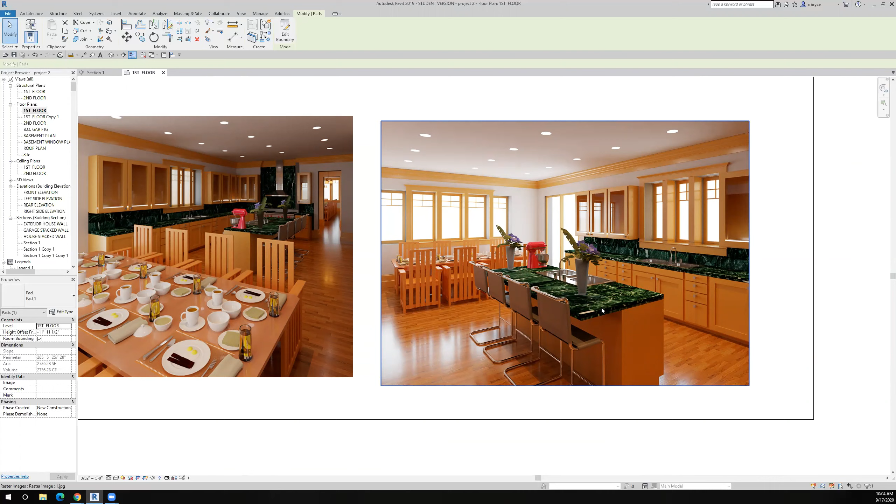So basically what I'm going to do now that I have my guidelines put in there is I'm going to go up to the architecture tab, and I'm going to go over to the component icon, but there's a drop down there, and I'm going to drop down and say model in place. So we're going to model this in place now.

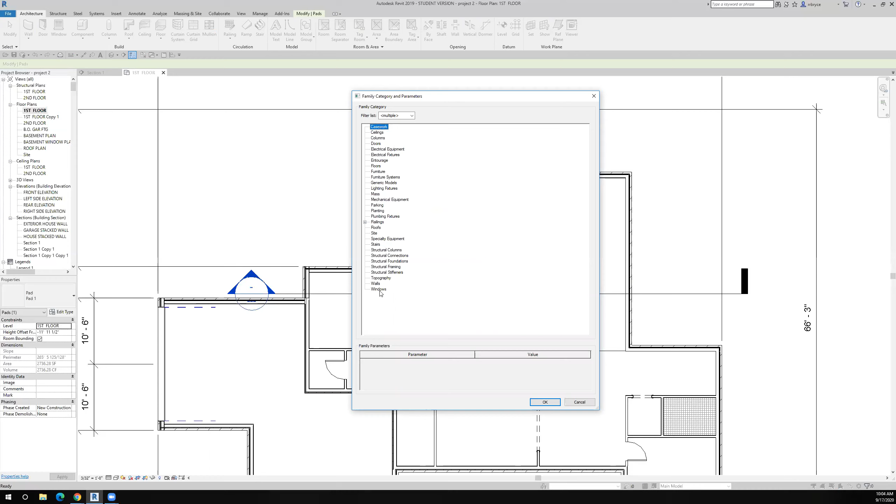I have to put it in a particular family, and I generally put my countertops in the casework family, but you could also do it in the generic if you wanted to. This will help you when you want to turn families on and off like you would turn layers on and off in AutoCAD, but I'll put it in the casework family.

Revit's automatically going to call it casework 1. And then the next one will be casework 2, casework 3. And you can change that to any name that you want to, but I just leave it alone. That's fine. So now Revit wants to know, what do you want to do? You told me that you want to make your own component, that you're going to model it in place. Which of these options here do you want to do now?

Do you want to make a void, or do you want to make an extrusion or a sweep? And we'll cover all of those other options at a later time. But right now, I'm going to make an extrusion. And so basically Revit says, well, give me the outside perimeter. So I'll use the rectangle or square icon.

And there's my perimeter of my countertop. And then Revit wants to know, okay, relative to the work plane, which is the first floor, where do you want this extrusion to end? And countertops are generally 3 feet tall, and in this case, we'll make the countertop 2 inches thick, which means that it's going to start 2 inches below 3 feet, or 2 feet 10 inches.

Okay. Now I can give it a material. Let's see what we have available here. In that tutorial, I made it green marble. I've customized the particular material, and I have another green marble here, but I'm going to just use tile because we can see it better. And we can always go back and change it later, but if I put it in as tile, it will show up for you to see a little bit better. So I'll use this porcelain 4-inch tile.

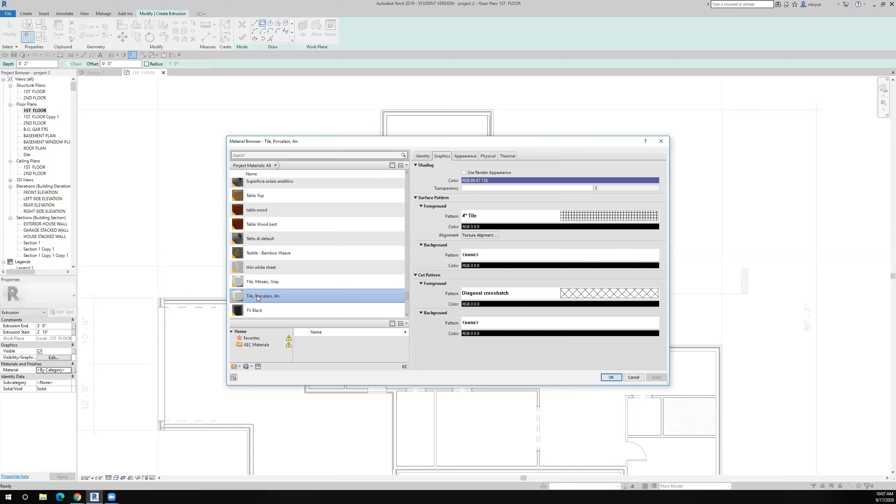Now, tile is a horrible material to use on a countertop because it has grout between the tile squares, which makes it very hard to clean. Generally, you would want a smooth surface like a marble or a granite, ideally, or a plastic laminate that has a smooth surface without the grout lines in it. That's not a good choice of materials, and I'll change it later, but I'll leave it like this now because of the way it will appear on the screen, and I think that'll help a little bit.

So, okay, I like what I have here. I can't do them all at one time. I have to do them individually because they have to be closed entities. So I will accept that. And now you can see that it's put the tile in there.

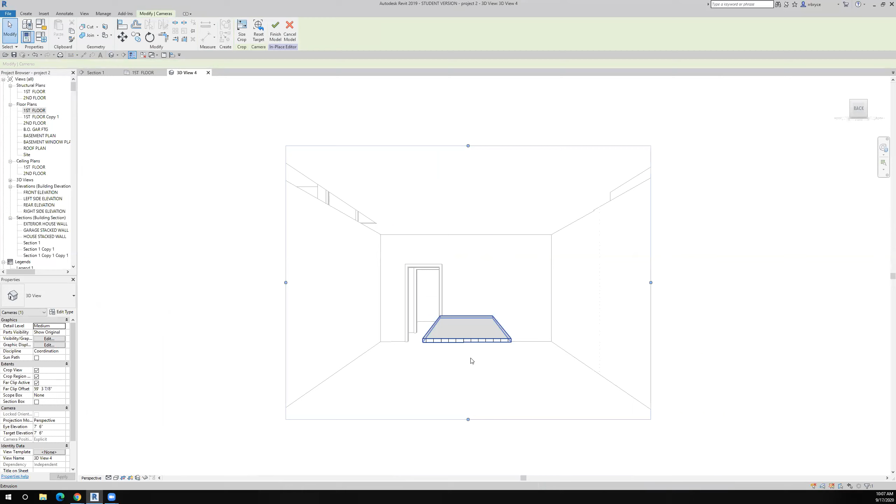But more importantly, I'm going to come over to this 3D and actually use the camera to show you what I have just done. So I'll put the camera right here, and I'm going to take a picture in this direction. And now you can see that I put this countertop in. It is 3 feet off the ground. Whoops. Let's go back and take a look at that again.

I'll highlight this, and now when I rotate this by holding down the shift key and the mouse button straight down and then moving the mouse around, it allows me to spin it. But it's rotating now about this object, whereas before it was rotating about some other place in space, which made it really difficult. So that's my first countertop.

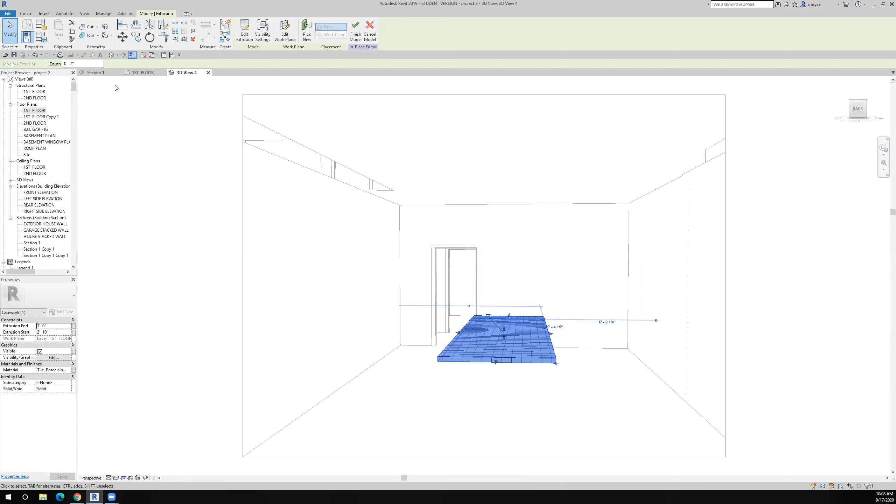Let's go back and put some more in. So it looks good to me. I'm going to finish that. And we're going to go back to the floor plan here. And I'll do it again. Architecture, drop down of the component to say I'm going to model it in place. We'll still use it as casework, but now look what happens. Revit adds the number 2 after that. They're calling it casework 2.

I'll say, okay, back to extrusion. I will just draw this one this time. So I'm going to draw the perimeter first. And it's very simple because I put those guidelines in there. And I will see that it defaults back to the same height and the same material. So everything looks good. I'll just say okay to that and okay to that.

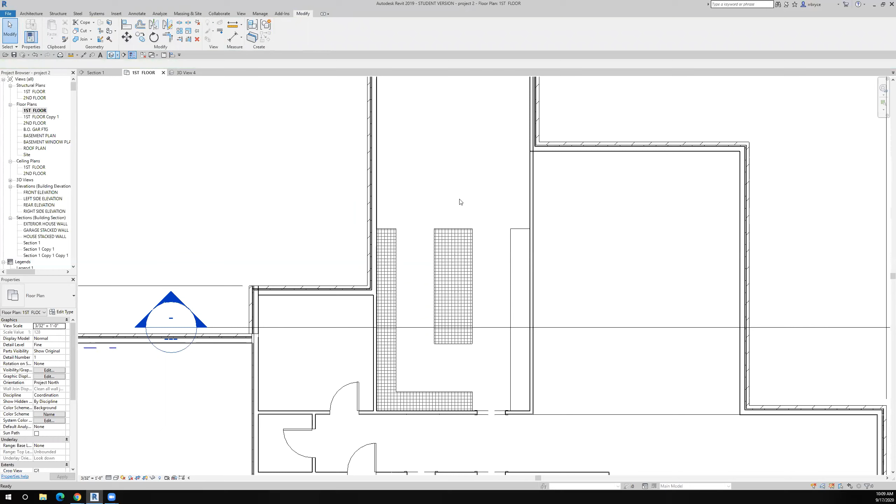And let's take a look again with the camera what I just did. So I'll put that camera back here, point it in this direction. And now you can see that I have put in 2 countertops. And I spin it around a little bit and you can see that.

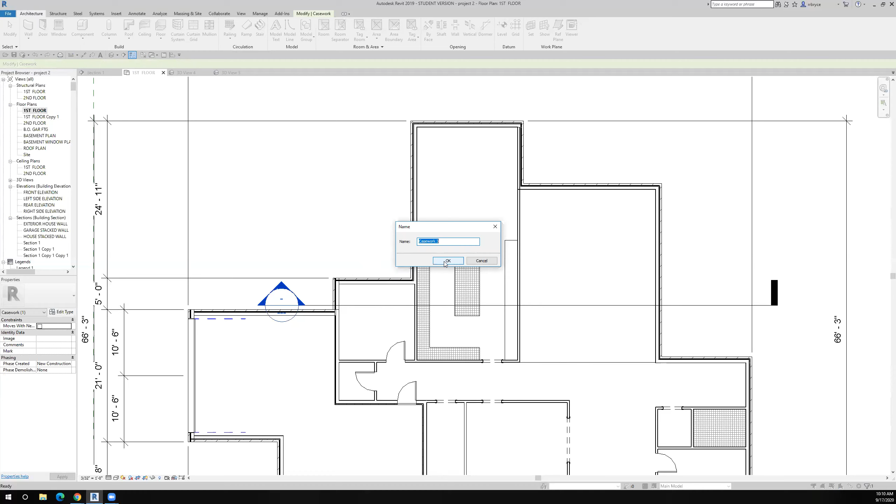So let's go back to the first floor, put our third and final countertop in, over to component, go to the drop down, model in place. I'm still putting it in the casework family. Now the name of that one is casework 3. Revit's adding another number every time. You can change the name if you want to, but I don't see any advantage to it, although there may very well be an advantage to that.

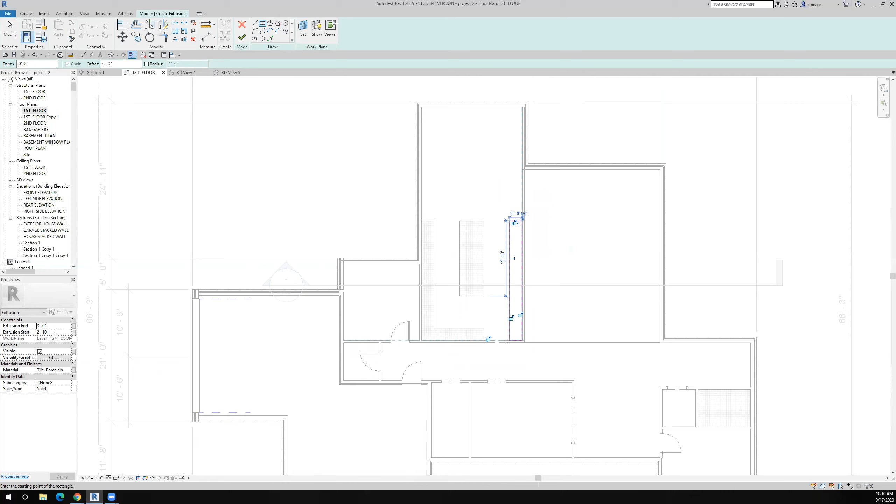And now I'm going to do an extrusion again. Well, I guess I can use this square now. I'll pick these 2 corners. It's defaulted to what I had set for the last 2. 3 foot is the extrusion end, 2 foot 10 is the extrusion beginning. I'm still going to use the same material. I'll say okay. I'll say okay. And I'll put that camera in and let's see what we just did here.

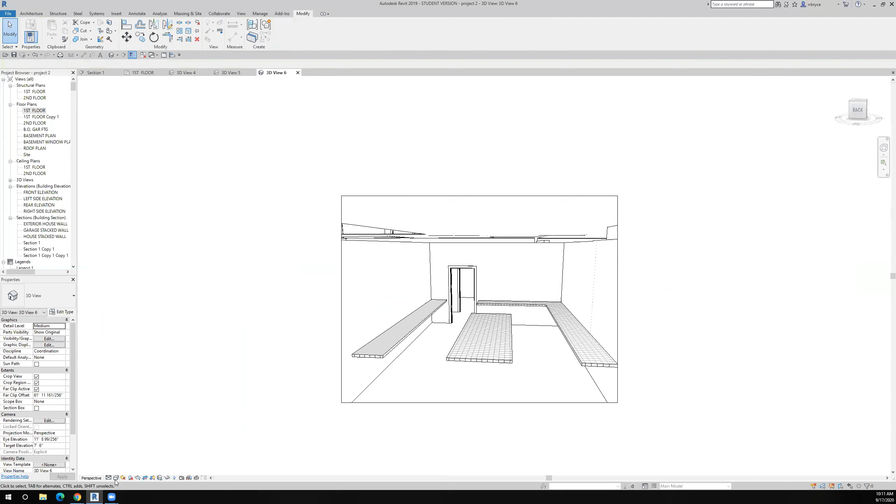Here we go. I'll highlight that so that it rotates about that object, and there's my countertops. I have just placed in an extrusion by defining the perimeter and then giving it a depth and defining the perimeter, giving it a depth, picking the material. Let's take a look at that in realistic. Maybe it'll look a little bit better. Not really. You can see the 3 countertops there.

Okay, well, so that'll be the end of this tutorial. Very quickly, put your countertops. If you have an island, put the island in there, and that will be the end of this one.